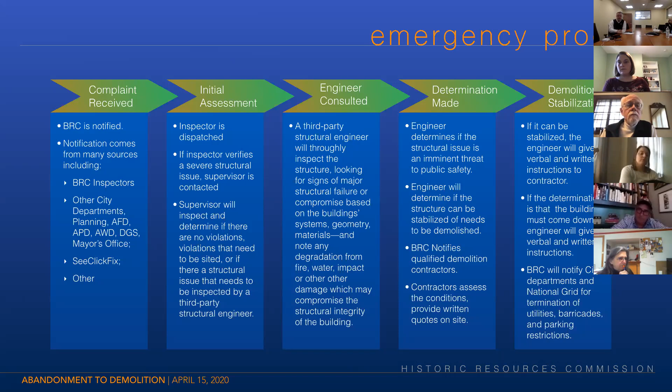If they feel that the condition of the building they come upon is beyond the scope of what they can handle, it's going to be more than just citing someone a violation. It might be an active collapse or a facade laying in the sidewalk. They will kick that up to calling in a supervisor. So almost always it's myself, but it could be my deputy as well. We'll come out to the scene to verify what's going on with the building.

And if we feel that some sort of emergency action is going to have to happen, whether it's a demolition or a stabilization, we call in our third-party engineer. That engineer comes out to inspect the structure. They're looking for signs of major structural failure or compromise, something wrong with the building. Again, we might open the front door and the roof is in the basement, which quite honestly is a high percentage of these buildings.

Once it's determined that an emergency action has to happen, whether it's stabilization or a demolition, my staff will then call in the qualified contractors that are on a bidding list that can do the work. We will go over the scope of work with them, with the engineer. They will bid on the work. It's read in the open. I collect them, read them aloud. The low bid wins the project and continues.

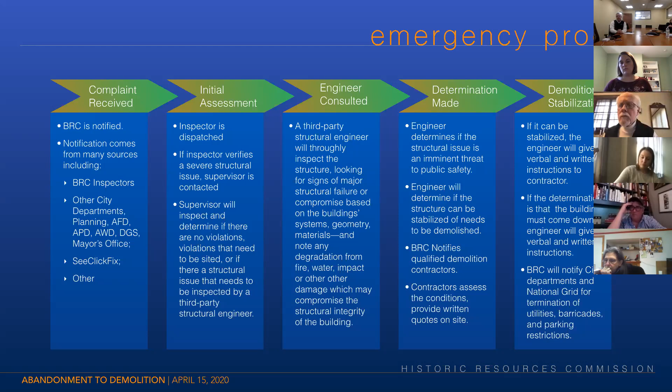Great, thanks. So I want to talk a little bit about what a structural engineer does. I'm sure some of you that are architects understand this to some degree. A lot of people have a little bit of a misconception of how this process works. When the structural engineer is looking at these buildings, they're not just looking at the building and nodding their head saying, yep, this building has to come down. They're using a lot of the critical skills they've learned in their licensing and professionalism in making those determinations. A lot of the critical skills you'll find in a structural engineer is this in-depth understanding of the physics and mathematics involved in materials and keeping a building standing up straight and making sure that is safe. It's an understanding of all the properties of the various materials, their density, the hardness, tensile strength, and the bending strength, and really understanding how those materials operate under different types of stress.

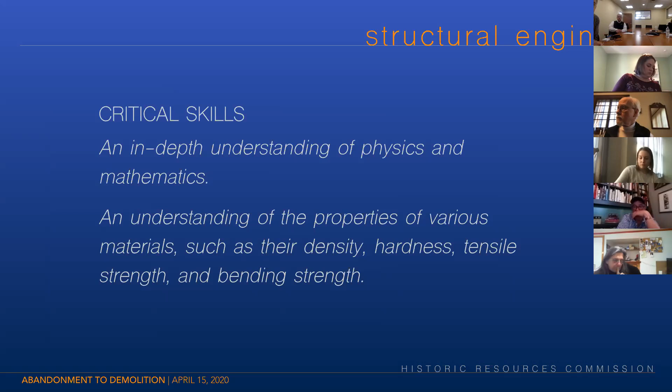So, when a building is constructed properly and it hasn't aged and none of the materials are compromised, all of the materials are operating the way they should be. But once different parts of that system start getting compromised, everything else is under stress. So that's what the structural engineer has to really understand. You have to be able to calculate all these materials, how they're going to perform under these stresses, whether it's compression or tension or any of the other kinds of forces acting on it, and then predict how these materials are going to perform over a period of time. It's one thing for the materials to be performing today, but how's it going to be working in 2 or 3 years if there's already been some sort of compromise?

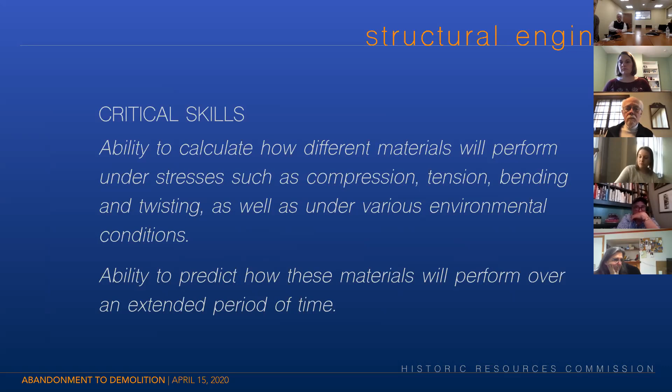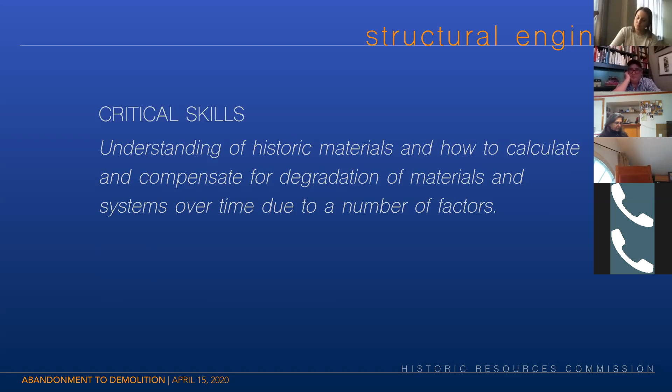Much different than a structural engineer who is just designing buildings or designing loads, there is the historic materials aspect. You're not going to find a lookup chart for the carrying capacity of an old growth timber frame beam in the middle of a basement, or how the actual piles are working within these buildings. So the structural engineer really has to understand these historic materials, how to calculate them and compensate for the degradation of the materials and these systems over time. Because once they degrade, you have to look at what other systems might be able to carry something that one beam was maybe carrying, or what other interventions could happen to make sure that building can either stay in place and be stabilized, or whether there's a determination that it has to come down.

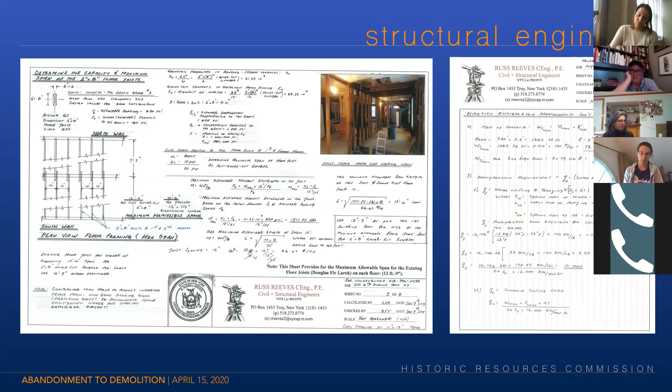And what you'll see when there's a stabilization, there's a lot of work that goes into really looking at the building, looking at the geometry, looking at whether the walls are plumb, whether the beams are not under stress, or what interventions are going to happen. You can see on one of Russ's sheets here a lot of formulas that I have no idea what they mean, but they look really good, and they're pretty impressive. But you'll see a lot of in-depth research that goes into any one of the stabilizations that happens within the city or any of these projects.

So structural engineers, they're licensed professionals. They put their stamp and liability on the line when they sign off on these building plans. Part of that is also indemnifying the city, making sure that we're not responsible.

I think it's important to know that part of what they have to do is, when they go home and sleep, they want to make sure that whoever's in that building or near that building is going to wake up safely. So it's not a matter of just a comfort zone, it's really a matter of doing the calculations correctly, understanding with a lot of certainty whether that building is going to stay up or whether the stabilization is going to work. And it's not just a stabilization for the building itself or the public, but you also have to think about the contractors that are going to be in that building, and whether it's even a safe building to have people working in, or if there's a safe way to get them in there to work.

So in the city of Albany, this is just 2019 data. Rick and his department cited over 2,944 properties within the city. Of those, only 2.3%, or 70 of those, actually went all the way to demolition. So there's a huge number of properties they are constantly working on, citing, making sure there are interventions so they do not get to demolition. Of those that were cited, 2,098 actually complied, and of the rest, 846 are in court. So in court means that there's been fines levied, and then it has to go to court because the people are not complying.

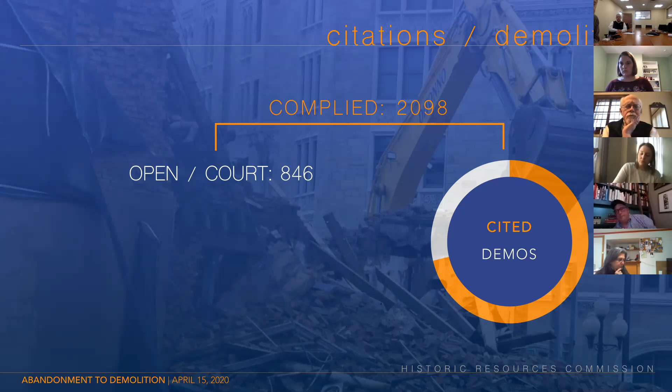One of the difficulties, we'll talk a little bit about it at the end, is that oftentimes even once it goes through the court system and a property owner pays the fines, they are not required by the court to then remedy the situation. So if they do not fix the building, the process has to start all over again. It has to be cited again, and it has to go through that whole court procedure again. So that's one of the issues that we're finding.

So I've just got to move something out of my way here. I guess I can't. So of the properties that were cited— Aaron, I can't read my own slide. Can you escape for a second and slide that out of my way? What are you looking to move? Well, it's everybody's picture here. So if you go up to the top, all the way on the left, there's hide thumbnail video, at the very top of it. Yeah, I just can't get that. I'm sorry, one second. You see the mouse?

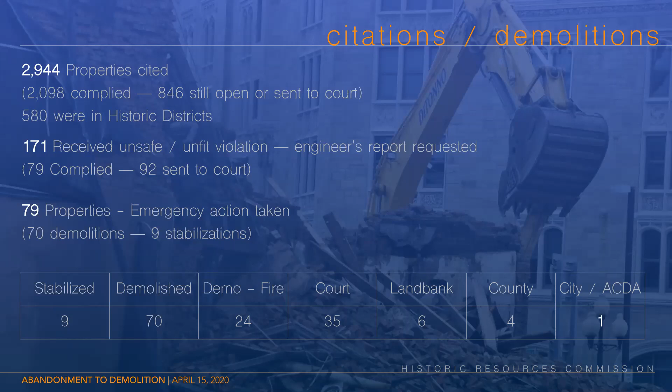Aaron, I'm just trying to minimize this. It's an important screen. Hang on, I'm going to escape for one second. Okay, nope, that's not helping. Now I'm not able to move it. Can't get to the tiles at the top there, right? No, I'm just not able to do that.

Okay, so I'm going to try to see what I can see. Of the properties that were cited, 846 were still open or sent to court. A number were deemed to be unsafe, unfit, and some of those were sent to court. I think the one we can't see says that they were stabilized, so 9 of those were stabilized.

Then 70 of all those 2,000 and something properties were demolished. 24 of those were because of fire, 35 of those were already in court. Again, it's important to note that all of these properties are, for the most part, privately owned.

So it's the responsibility of the property owner to maintain these properties. The city is trying to get them through the court procedures, trying to cite them, but sometimes people just will not comply.

All right, Aaron, I shouldn't have hit escape. It's still full, still full. Okay, let's try it. Sorry about this. Okay, let's see.

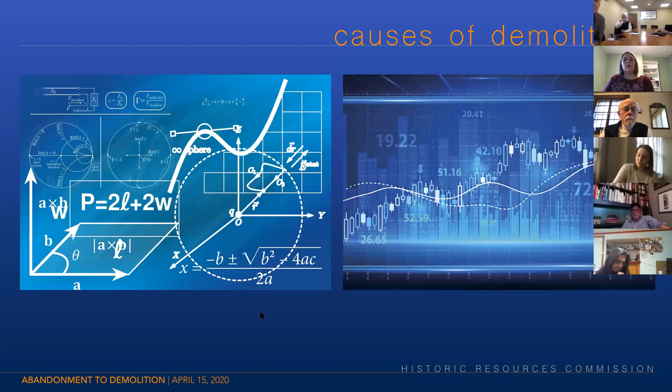Okay, so I want to talk a little bit about the causes of demolition. There are really, I would say, two primary causes. One is really physics, the other is economics.

When a building is standing the way it was designed to stand, there's usually no issues with it. But the problem comes in when people don't maintain their property. Sometimes this is because of economics—people just can't afford to—but other times they make economic choices not to put the money back into it. Oftentimes it can be the other way too: we look at a property that may have to be demolished, not necessarily because there's no way to stabilize it, but the cost of doing it is so prohibitive that it doesn't make sense.

So we really have to think about when buildings are maintained and all the systems are operating the way they're supposed to, all the walls are plumb, there usually are no issues. But once you get water infiltration from a lack of maintenance, these buildings tend to deteriorate pretty rapidly. So these are just the basic forces that act on any building, building system, or material.

Compression is really gravity and the weight of what's above a certain building member or in the walls—all the loads, the idea is to transfer them down through to the footings. Tension is really the pulling apart, so a lot of the materials aren't made for that. Bending is really when you get a sort of lateral force in any one direction.

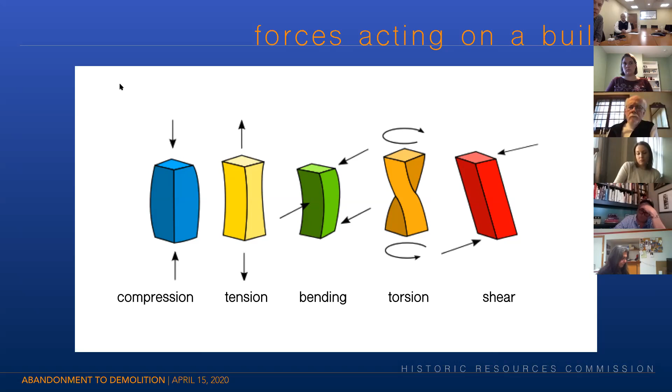Torsion a lot of times will occur when something is missing, when part of the foundation is missing, and the whole wall can start to twist. And shear sometimes will happen when there's quite a force coming in one direction or the other.

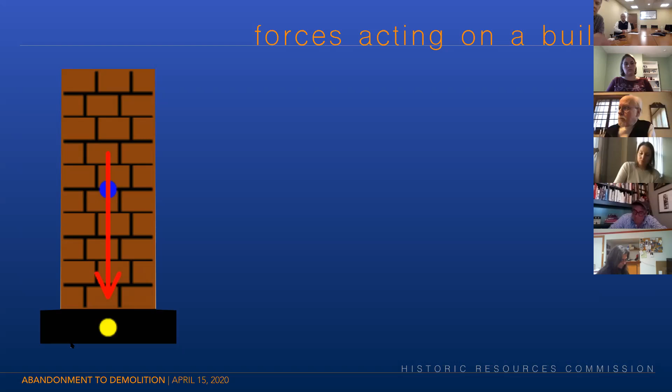So what we see often in the city of Albany is masonry construction. Masonry construction is excellent in terms of its compressive strength, and that is about all it has. It's got a little bit of tensile strength when it's probably new and the mortar is good, but as the mortar gets really old, it becomes pretty dried out, and there's very little strength in that.

To make the entire building work, you have to have all of these other things—a whole framework inside that building so those masonry walls can withstand some of those other forces. So you've got lateral forces coming in, the weight of the roof coming down, all of those have to be transferred one way or the other.

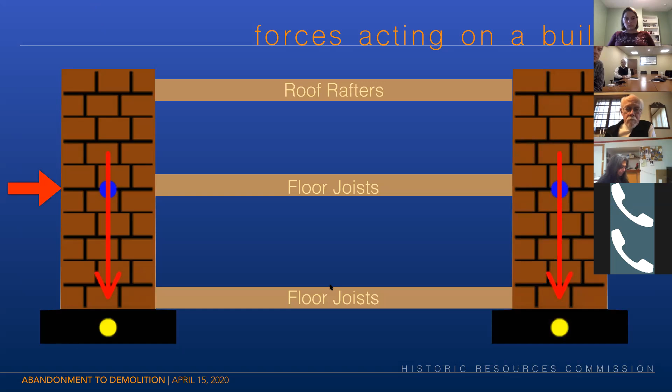But again, those masonry walls, when they're plumb and everything else is operating, are extremely strong. Once they get compromised, you have a lot of issues, because that wall has no strength laterally, it has no shear strength, it has none of the other strengths to resist those forces.

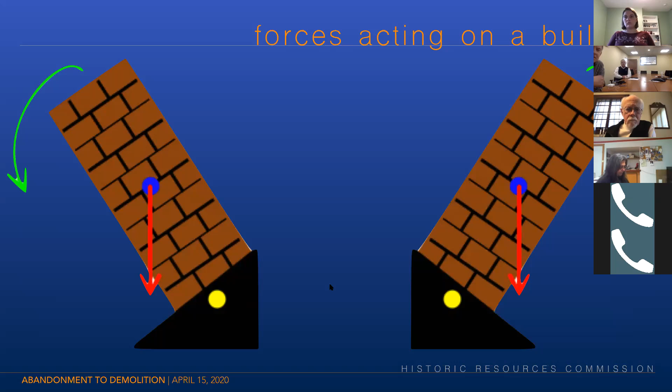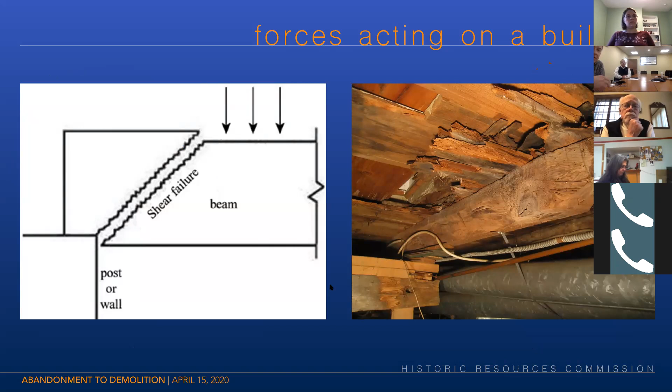A lot of times you'll see the beams in the basement, through water infiltration or other issues, become compromised to the point of shear failure, where the weight of everything above it will actually crack that beam, and it will have successive failures up through the rest of the house or building.

And obviously we have fires that compromise buildings to a great degree. Sometimes the fires happen and people do work later on in the building and don't actually address some of the issues. Sometimes in older buildings you've got joists that are pocketed into the masonry wall, not cut correctly. So when that joist fails, whether it's from a fire or some other failure in the middle of the joist, if it's not a fire-cut joist with that angle on it, it'll start to put pressure outward on those walls.

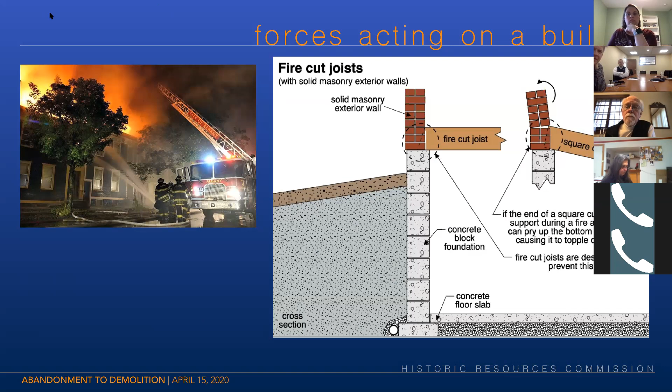So those are some of the issues we see a lot of in the buildings we deal with all the time. Again, when the force on a beam or a roof or anything is too great, rather than transferring that load vertically, it puts pressure outward on the exterior walls and can create all sorts of problems.

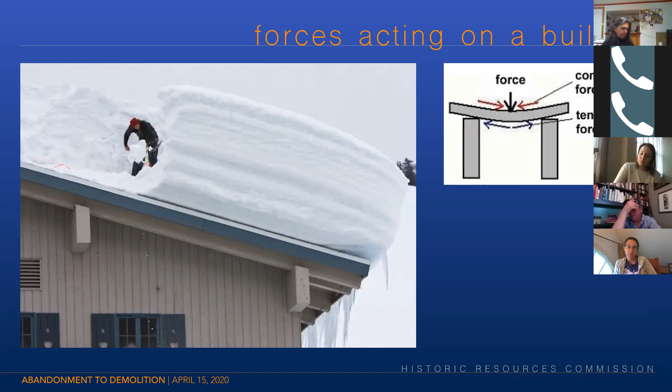We do get snowfall in this area, hopefully not as much as in this picture, but oftentimes with an older building, when you have cracked beams and things like that, you can have very catastrophic failure from the loads on top of the building, not just from the building materials itself.

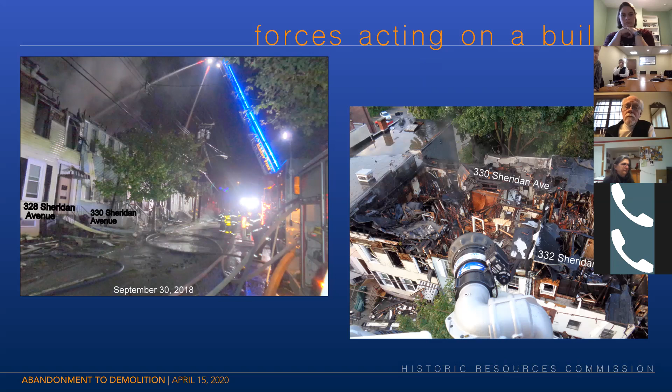This was one of the fires on Sheridan Avenue. From the front, the building itself looks somewhat intact. But when you look from up top, in the picture that Rick LaJoy took from his trusty lift on the fire department ladder, you can see that the entire interior of the building has been compromised. Those are the things that are really difficult to do anything about in terms of stabilization.

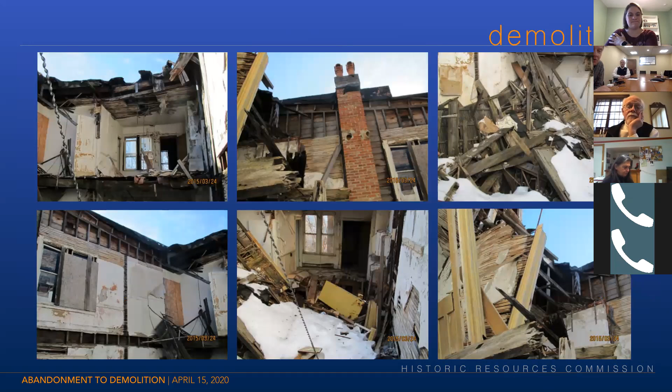A true open floor plan — no roof structure, no wall structure, no floor structure from one floor to the other. So what you're seeing from the outside before demolition, and sometimes even before we have our eyes on it, this is the actual case.

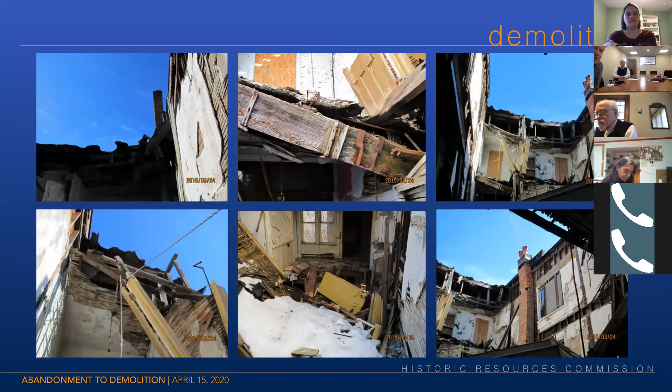Sometimes this is caused by, and oftentimes we see a lot of issues related to, that center drain on many of these roofs, where it gets clogged and the water continues to go down through the interior of the house. Oftentimes you don't even see the issues through the roof — it's all happening internal to the building, and there's no outward signs of it until there's some catastrophic failure.

Typically when an engineer comes to the site, we get a report. Some engineers will provide a one-page observation along with a bunch of photographs, and this is kind of what we get: something that says, based on our visual observation during this site visit, it is our opinion that this building is in poor condition and that emergency demolition action is warranted.

One of the things I've been impressed with, after going through a lot of these reports, is the work that Russ is doing — he's actually explaining and noting with each photograph what's going on. So I'm going to read a couple of snippets from different ones of his reports.

Here's one that says: there are multiple collapse zones within the rear half of the building at each floor level, such that the roof has collapsed into the third floor, and the third-level floor has collapsed into the second floor level, in a progressive mode of failure. You can imagine the condition in a building like that.

This one: the rear half of the first floor is on the verge of collapse and will induce a rupture in the rear masonry wall. Additional collapse of the remaining floor system, due to gross deterioration, is considered imminent at this time.

So these are time-sensitive things. These are not things where the engineer can look at this and then walk away or just say it's really not that bad. So another one: portions of the second floor are on the verge of collapse and will cause a partial collapse of the second floor level facade into the city right-of-way.

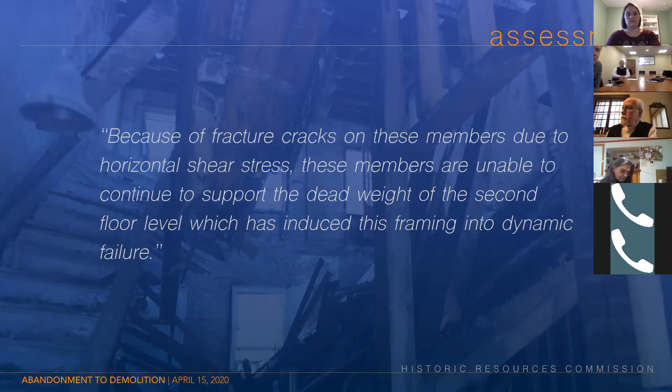And here's one where they talk a little bit about the cracks. Because of the fracture cracks on the members, due to the horizontal shear stress, these members are unable to continue to support the dead weight of the second floor level, which has induced this framing into dynamic failure.

And typically they end with this: the present condition of the building is considered a high hazard to public safety and shall be removed as soon as practicable under the City of Albany's emergency condemnation procedures. So when you read a lot of these reports that Russ has done in particular, you'll be able to read a little bit of the story of what happened to the structure of that building and why that building has to come down. It's not just an overall judgment call that the building is in poor shape and should come down.

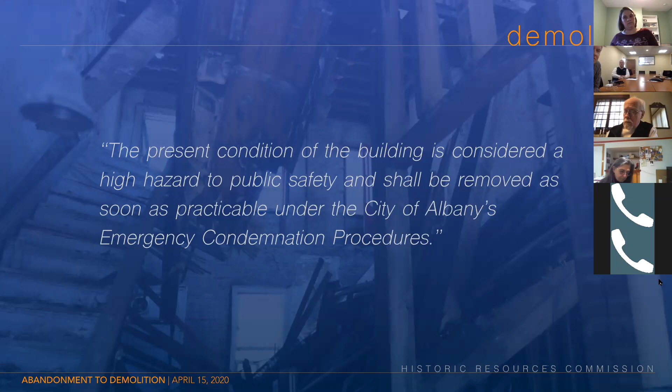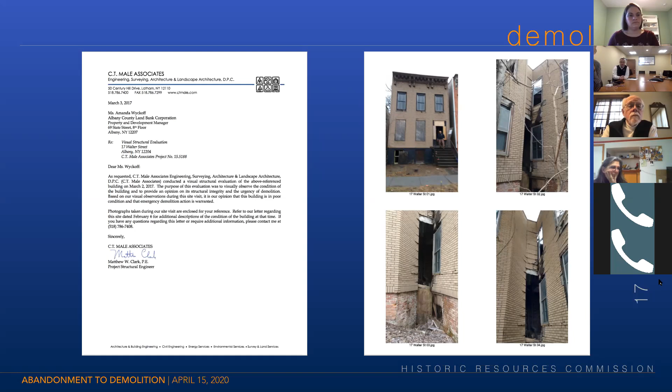They notified us that there were some floor collapse inside. We met their engineer on scene. And quite frankly, this is the only time in my tenure where I was going to override the engineer and use our given authority to do a demolition, because they didn't feel... his statement to me was, well, I don't know if it's going to fall today.

And unfortunately, once we're notified and we're there, we don't have the luxury of walking away with a crapshoot saying, well, it might not fall today. If we were to walk off that scene and something were to happen, we're on the hook because we knew about the condition. This was next to an occupied structure, probably 3 or 4 feet away, and it clearly had severe issues.

So he reevaluated it and understood the essence of what an emergency is as it relates to the city being on scene versus a planned demolition, where they may feel they have ample time to go through the demolition process, go in front of whatever means they have to go through to do that. This certainly was not that, didn't meet that criteria.

This needed to happen. And even with the pictures, as devastating as they look, until you're inside one of these things and you can feel the dampness, you can see the saturation, you can put your foot through the floor just by stepping inside—pictures don't do it justice. These buildings are very hazardous to the public, and as a recipient of a traumatic head injury from one of these buildings, I can tell you I'm not willing to gamble on life safety.

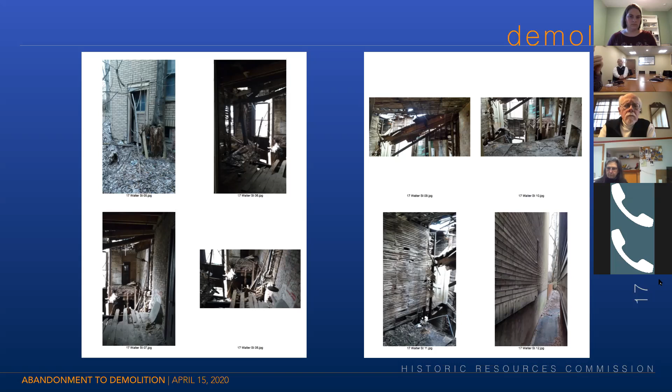And I think certainly anybody who owns a property on either side of a property like this would not appreciate it if the city was going to walk away from a building in this condition once it was found to be in this state. So not only is it dangerous, it's completely irresponsible to walk away from a building like this and not address the issues.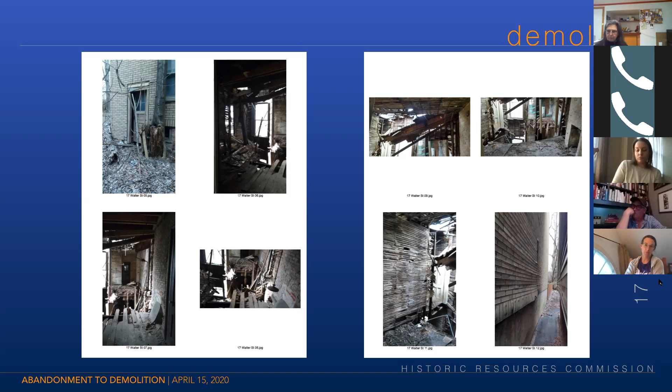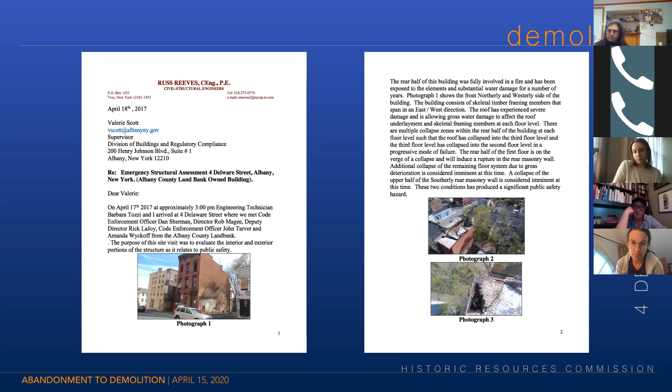The entire interior of the structure was compromised. The main bearing beams were all compromised. And again, you're starting to get a twisting motion from this particular building.

This is 159-161 Eagle, a lot we're really looking hard to try to stabilize. I'm going to ask Russ to walk through this, since this was one of the properties we looked at. I'll put up a lot of the drawings and let him talk through the process, because we spent a lot of time and effort coming up with a stabilization plan, even bringing all the contractors here to our building to do a PowerPoint so we could safely walk them through and show them what the stabilization plan was going to be. So go ahead, Russ, if you want to talk about this one.

Yes, you probably have to talk a little louder. Thank you, Chris. Can everyone hear me okay? Aaron? Yes, okay, yeah, okay.

This building, 159 to 161, these were brick buildings. Each one was very heavily damaged, heavily water damaged. Large portions of the floor system had failed, but we developed a methodology to put in a skeletal steel frame into the building. That skeletal steel frame served several purposes. It was actually able to restrain the brick bearing walls, the exterior brick bearing walls.

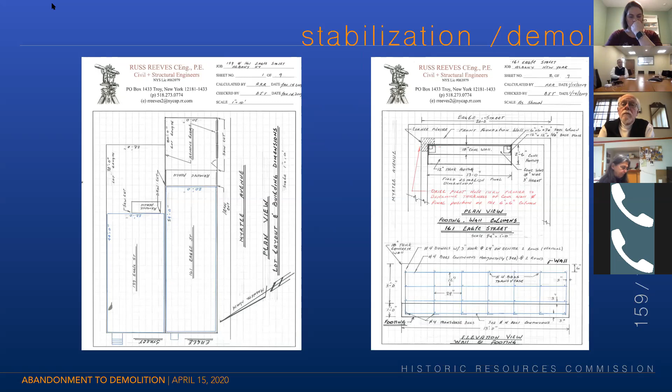Again, this is in theory, if we were able to go that far. Not only would it restrain the perimeter brick bearing walls, but it also allowed us to insert a new skeletal framing system. What you see here is some of the foundation treatment we used. The drawing to the left shows some of the steel columns we were putting in, along with threaded rod that allowed us to restrain the outer wall.

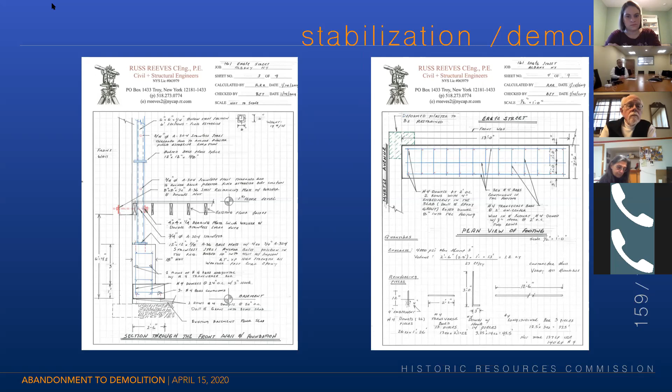To the right was the footing we used here, along with the reinforcing schedule for the contractor. We explain everything A to Z for the contractor, so he has an understanding of the reinforcement pattern needed, the length of the rebar, the placement of it.

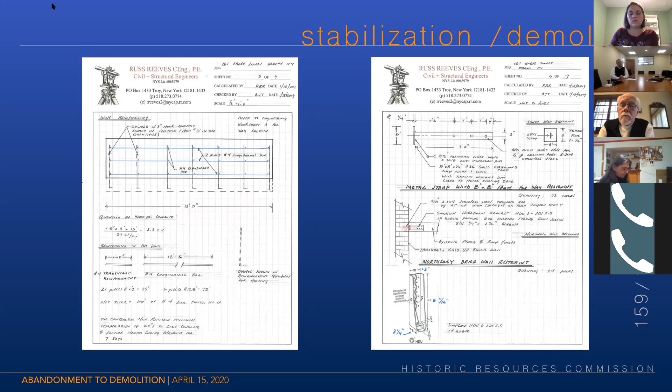We've developed a special brick masonry wall tie over the years that we utilize, which allows us to pick up about 3 feet of the floor joists, giving a good development length that allows us to restrain the outside wall properly, picking up a total of 3 fasteners per floor joist. This gets a very tight configuration, which we've used quite a number of times in building stabilization throughout the city of Albany.

Now, these brick walls were deformed very badly. Over the years, we developed a rigid steel frame that's braced sufficiently to keep a brick masonry wall intact. As Chris was mentioning, quite often the brick masonry that deflects is deformed. It doesn't really have the tensile strength because of the nature of the masonry material and the mortar. This braced frame allows the structure to maintain rigidity by transferring the loads through this frame that you see. That's what we've been able to develop, and we've had pretty good success with it.

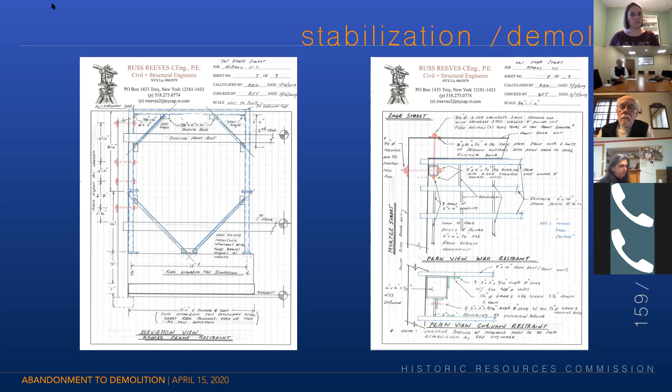That's shown on the left side, elevation view. The right shows this configuration in plan view. Again, we try to be very explanative, providing as much detail as we can to the contractor so it helps him assemble this correctly. This was the framing that was utilized at the back of the structure.

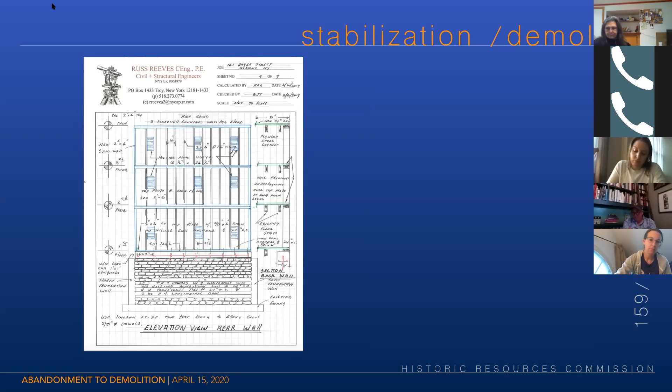Now, this particular building, 161, 159, was very hard to control. There was a lot of groundwater migration, and over about a month's duration, maybe 3 weeks, the exterior perimeter bearing walls destabilized. As a matter of fact, it went into dynamic failure because of a lot of groundwater migration from uphill areas, so we weren't able to do it, it was remarkable the progression that the exterior bearing walls took.

Rick, do you want to talk a little about the cost on that project, and how that's affected in terms of stabilization versus demolition from the county perspective? Right. So often these demolitions are billed to an owner, and essentially the owner doesn't pay it, so it goes on their taxes. We pay the contractors through the city, and then the county reimburses us and takes the property through foreclosure. This particular property, we knew the significance of it. The intent was to save it. We developed this scheme and notified the county to let them know what was going to happen, that we wanted to save it.

And their direction to us was no, that they were not going to pay for it, that if the cost of stabilization exceeded the cost of demolition, or vice versa, if the stabilization cost more than the demolition, we were tasked with having to do the demolition.

We pushed back. This particular building, there was a lot of pushback. I all but begged to save one of the structures, kind of sacrificing the other one. They were giving us a lot of pushback, and quite frankly, we got a really bad snowstorm. When we went there, my intention was I was still going to save one building and sacrifice the other. Then within a matter of 2 days, the building rolled about 6 inches off its foundation.

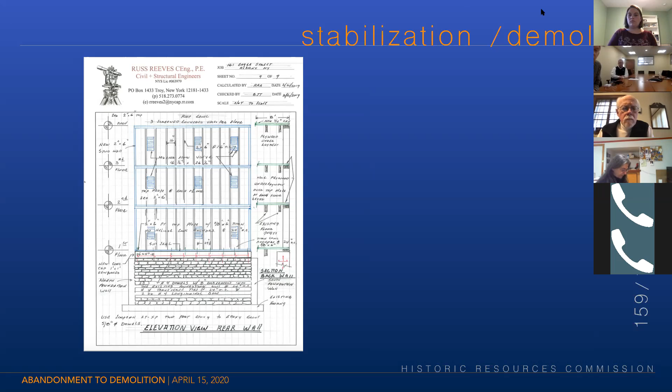This building, including the basement, was 4 stories in height. The entire interior framing members collapsed from the roof right down to the basement. But 3 of the side walls — the front facade and the 2 side bearing walls — were intact. The rear wall was on the verge of collapse. So what we did, we left about 2 feet return of the masonry in the back. They acted as a pilaster and gave us some rigidity to the structure.

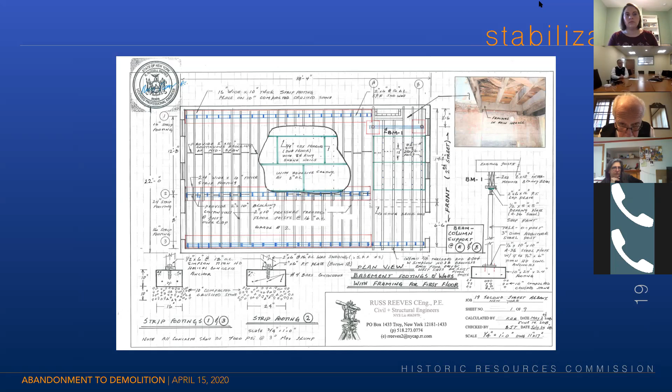So we got all that out, and then we started. What you see here is a plan view of the basement framing. We poured strip footings along the easterly and westerly bearing walls, one about 8 feet away, and then we inserted 2x6 stud bearing walls and floor framing. We worked our way up. You can see some of the footing details.

Along the way, as we prepare these drawings, we also calculate large beam sections that we use — micro-lams and so forth. We put our work right here, we show our work right on here. We do that because if we have to adjust ourselves in the field, we already show how we arrived numerically at some of the sizing of the structural elements. That helps us if we have to adjust based on what we find in the field. So we show all our work on each of our designs, and all the engineering on the worksheets as well.

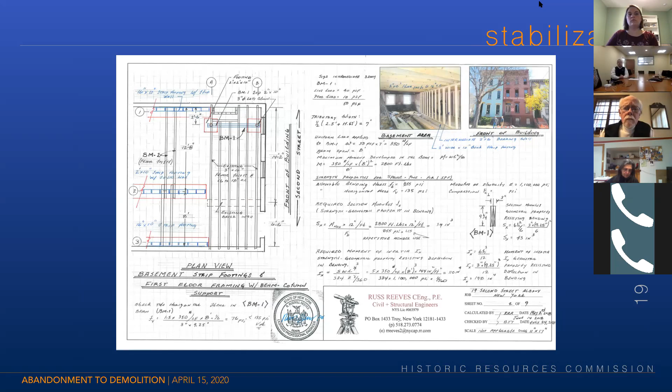This particular one, we just left the basement and we're up to the first floor level. We had to build some beams to pick up certain areas that were required. This is an elevation view — excuse me, this is an elevation view of all 4 stories and how they're going to be restrained.

One of the things that was a little tricky is that we had no access to the, sorry about that, I don't know why they did that.

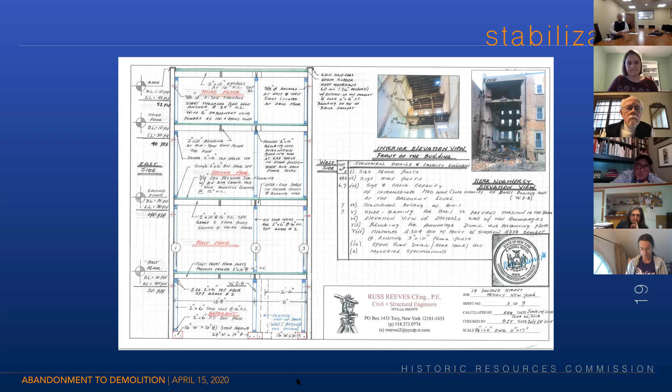We had no access to put in steel plate and threaded rod on the outside of the building, which we normally use to restrain the exterior walls. So we used a special methodology with 3/4 inch threaded rod and a special epoxy, along with a special framing system that allows us to restrain the exterior masonry walls back to the interior frame we just created. That's what we did in this case. You can kind of see some of the threaded rod locations we utilized, though it's a bit difficult to see.

When we do these designs, we recognize that in some cases this building may remain vacant for 15 to 20 years. So a lot of our designs have longevity built in, and we seal up the envelope of the structure to make it watertight. The epoxies we use are very resilient, and we have a lot of good experience with different types of epoxies, like Sika products.

A lot of our designs follow ASCE 7, which covers applied loads to structures and buildings. That's a design guide we utilize, and we design these members assuming there's no heat present. That increases the loads we have to account for, because snow can sit on the roof longer than it would in a heated structure. That's reflected in some of the calculations you see here.

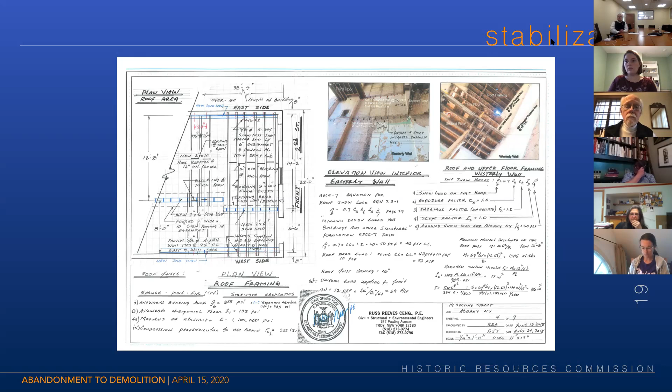This particular item shows some of the special framing required in certain instances we encountered in the building, along with the load calculations.

We provide venting to the structure to make sure we get good airflow. We recognize that at some point this structure will be vacant for a period of time, so we ventilate all the buildings we stabilize.

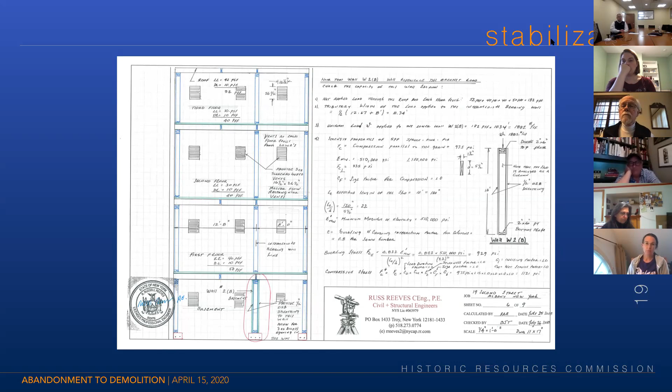Here we calculate the load capacity of the lowest floor level, based on 2x6 framing. Because this building was so heavy, we have to make sure all the framing we utilize, especially at the lower level, can take the weight starting from the roof level all the way down. That's reflected in these calculations.

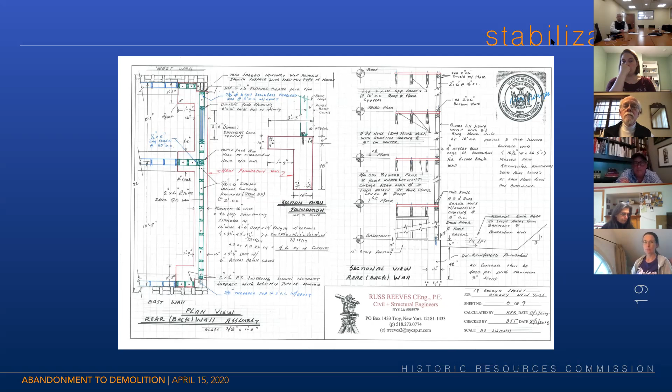This is the special foundation requirements at the back of the building to accommodate wind loads and how it's framed in. Going up four stories, there's quite a bit of wind load on the back of this building, both in terms of pushing and a suction load associated with that, and that's reflected here.

These are some additional structural anchorages that we utilize for brick walls. And then we have a new EPDM roof section shown there for the contractor. So that's what was involved in 19 2nd Street.

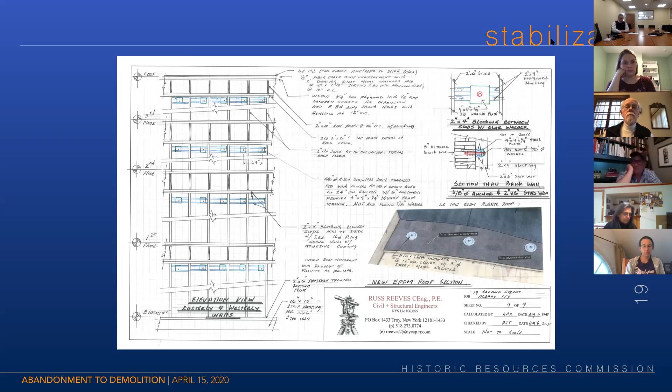Very substantial stabilization, but we had an opportunity to do that safely, and that's what we were able to accomplish. So I'm just going to run through some of the pictures of the progress during that construction.

This is what it looked like when we arrived on scene. There was a staircase, and that was about it.

This is partway through the excavation, where they were able to brace up the roof enough that some roof remained, and they could start removing debris from the back of the house. This is one of those areas where we were lucky enough to have access to the back of the building. I think it probably wouldn't have been a feasible project without that.

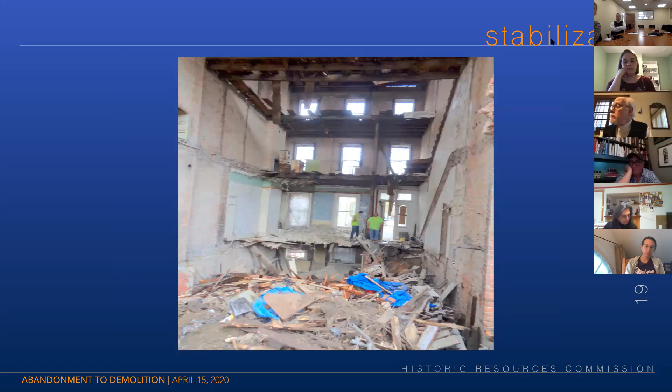There's some of the framing starting in the basement level, and that's the back foundation wall all the way to the right, with some framing going on. This was done in two phases, as you'll see at the end here.

I just wanted to point out the monitors on the building next to it. There are spacings and crack gauges there to look at the movement happening. When facing this building from 2nd Street, the building to the left had been moving in one direction, so we were monitoring that to make sure nothing was getting worse through this process, and that any issues could be addressed.

But this was really done in two phases. The first was all the interior work. Our intent was to try to get the property owner, once we reached a stable point, to then take on the project, finish it, get it weather tight, and get it closed up.

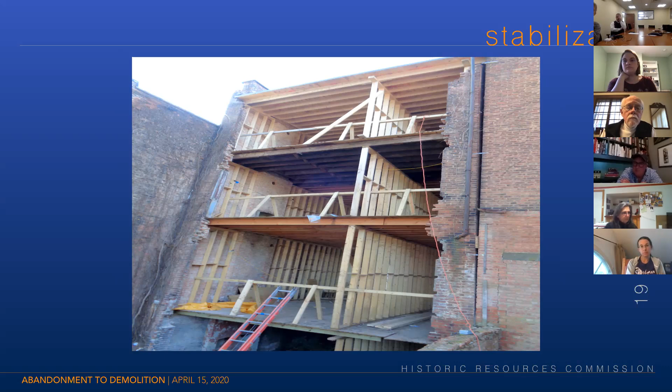We were unsuccessful in getting the property owner to do anything, let alone returning certified mail and affidavits and all sorts of stuff we were sending. So we had to go to phase 2, mainly because we had to protect the property owners on either side. Leaving it like this would have compromised all the work that was done, and would have allowed water to get into the foundations on the properties on either side and pooled up within the basement of this property.

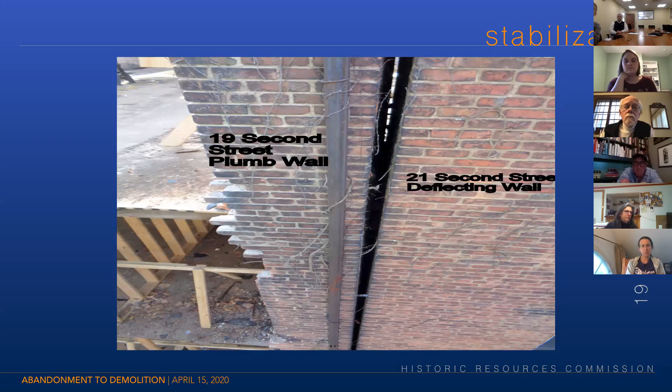There's the back of the building, second floor, the upper part, and some of the roof structure going on. So I want to talk about the crack gauges, looking at that deflection on the wall at 21 2nd Street. You can see that separation, how it gets wider as you go to the top.

So I want to talk a little bit about the costs on this one. This is really where we end up with an economic issue. Starting with this project, there's $10,000 of property taxes owed. The estimated cost of demolition would have been $65,000. That's the easiest thing to do, but for the reasons we thought demolishing that would have ramifications to 21 2nd Street, we wanted to make sure we're not demolishing 2 buildings. We wanted to try to control that and save that entire block of buildings by saving this building.

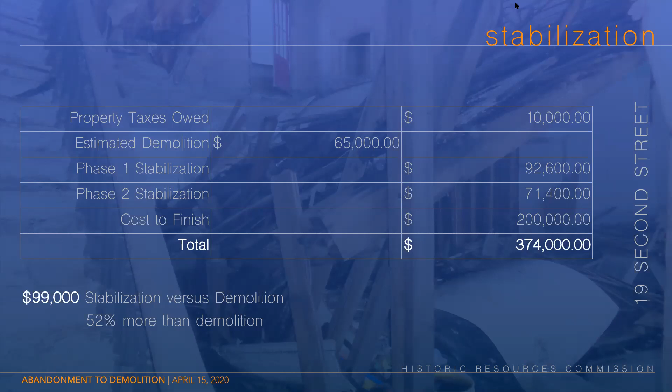So the phase 1 stabilization was $92,600. Phase 2 was $71,400. And because this would typically be a 3-unit building needing all its mechanicals, electrical, insulation, and finishes, about $200,000 to finish. So all told, about $374,000 by the time you get this project to a finished state where you could rent it out or sell it. So the cost of stabilization was about 52% more than the cost of demolition.

So that is the issue we face a lot: the economics of this, spending more on stabilization than demolition. The other thing the county and we are all concerned with is doing a stabilization that in 5 years is then going to be a demolition too, so you have the compound cost of both of those together.

By the time we get to this position, when an emergency is called, a lot of these buildings have been vacant for 10, 15, 20 years. There's been no maintenance happening on these buildings. They've been ignoring citations they've been getting, oftentimes ignoring the courts. So the demolition end of things is really the end of the line. There really aren't a lot of options when we get to that point.

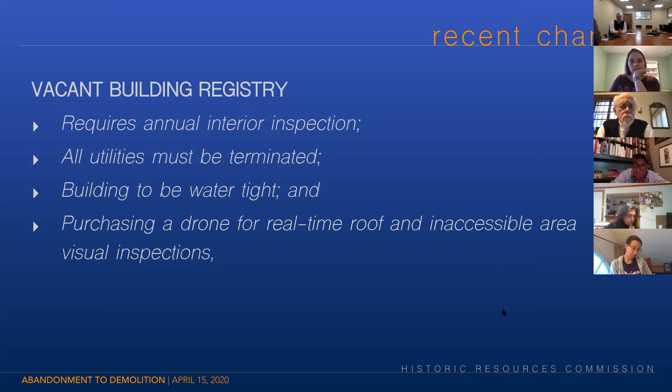19 2nd Street, just to give you a quick example - I started with the county in 2013 and was at my very first emergency demolition across the street from there. At the time, some of the folks there did the typical argument of why are we tearing it down. I had a conversation with Sue Holland at the time, and I told her, standing on scene when it's too late does nobody any good, it's not helping anybody.

I used as an example 19 2nd Street, because at the time the county was in possession of it. I took her for a walk through that very building that you just saw all those pictures of. In 2013, we had a slight roof leak and all the walls were intact, all the plaster was intact. Now fast forward 5 years, that small roof leak became catastrophic to that building, at a cost that you just saw. So again, our whole intent is being preemptive.

It's not about the demolition and the process once we're there and we have to deal with an emergency, because quite frankly, at the end of the day, my only concern is life safety. So backing up and trying to get there from the beginning was the foresight and the amendment change.

So the other thing we're doing is purchasing a drone so we can get real-time information on these properties, at least on the roof and some of the back areas of the house that are inaccessible. Using Google Earth and satellite view that's 4 years old is really not doing us much good. So we've got to be able to get there, take a look, and get closer inspections on a lot of these properties as much as we can.